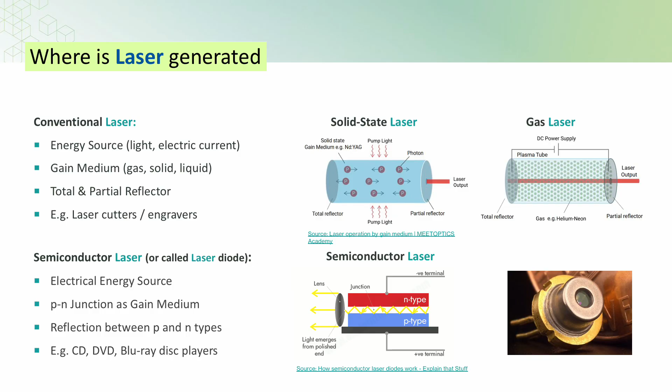Semiconductor laser is another kind of laser that uses a p-n junction to form the laser. It adopts quite a different design and is much smaller in size. We can find it in daily equipment like CD, DVD, and Blu-ray readers. For simplicity, let's stick to the conventional design first when you try to imagine and understand the laser generation mechanism.

Here is the physics of the laser generation mechanism. Step 1. Energy input into gain medium. The energy source provides energy to the gain medium to be absorbed by the atoms inside. Atoms in different gain media would have different energy levels and thus different sizes of gap between energy levels. This gap determines what wavelength of energy the atom can absorb, store, and emit.

Step 2. Spontaneous emission. An atom that has absorbed energy becomes excited. An excited atom becomes unstable and tends to emit the energy out naturally. The emitted energy has the wavelength that matches the gap of energy levels of the atoms. This emitted energy can also be called a photon.

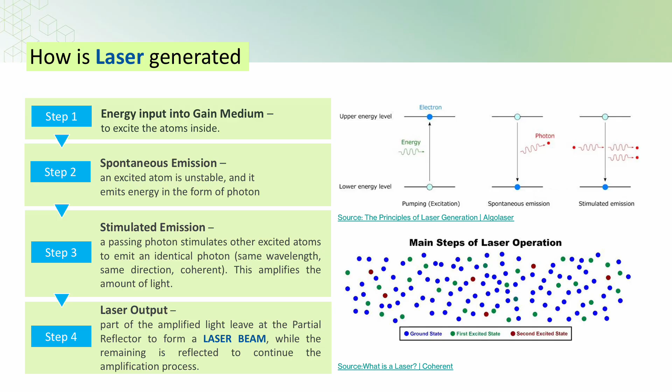Step 3. Stimulated emission. The emitted photon will move through the gain medium. When it passes through other excited atoms, it stimulates the excited atoms to emit photons of the same wavelength that move in the same direction and coherently. It thus amplifies the amount of light. Step 4. Laser output. Part of the amplified light leaves at the partial reflector to form the laser beam, while the other part is reflected to continue the amplification process. This is how a laser source generates laser continuously.

It is a table about how different materials of gain medium would emit different wavelengths of energy and their application. For example, CO2 gain medium would help to emit laser light at wavelength 10,604 nanometers, which is in the range of infrared. Suitable wavelengths of lasers must be chosen for different applications. For example, the laser light emitted from CO2 laser does not have wavelength efficiently absorbed by metal, and thus CO2 laser is not suitable for cutting metal.

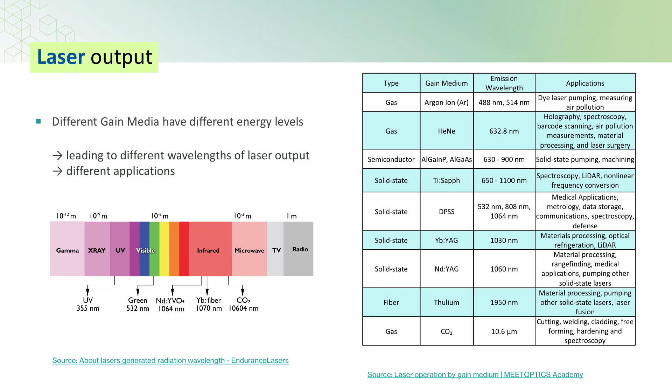Lasers are widely applied in different fields. For example, in medical fields, it is used for kidney stone removal, while in scientific research, it is used in LiDAR system to detect weather conditions. Lasers are often used in the laser show for entertainment. In daily life, we can also often see the use of laser, like barcode scanner when we check out in supermarket, and DVD reader at home. We also have laser cutting and engraving for industrial use, and laser used in optical fibers for communication.

Now let's move on to the laser classification. The EMSD of Hong Kong government has a web page providing laser safety guidance, which are composed based on International Standard IEC 60825, provided by International Electrotechnical Commission. Our laser safety and classification would be based on the guidance provided by EMSD. Laser product can be classified into Class 1, 1M, 2, 2M, 3R, 3B, and 4.

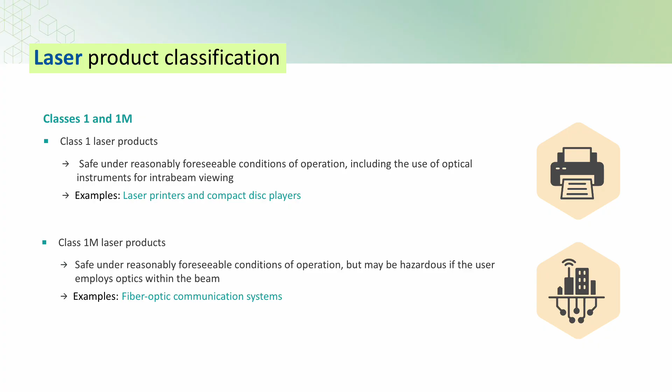Class 1 laser product is regarded as safe under reasonably foreseeable conditions of operation, including the use of optical instruments for intra-beam viewing. Examples are laser printers and compact disc players. Class 1M laser product is also regarded as safe under reasonably foreseeable conditions of operation, but may be hazardous if the user employs optics within the beam. Examples are fiber optic communication systems.

Class 2 and 2M laser products have higher risk than Class 1 and 1M. For Class 2 laser products, it is considered not inherently safe for eyes, but protection on your eyes by natural aversion response is usually adequate. Examples are laser pointers and barcode scanner we use in supermarket. For Class 2M laser products, eye protection by aversion response is also advised. The product would also become more hazardous if user employs optics within the beam. Example is the level and orientation instruments for civil engineering applications.

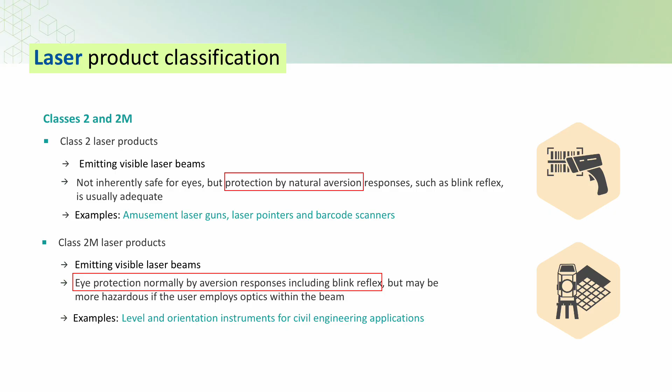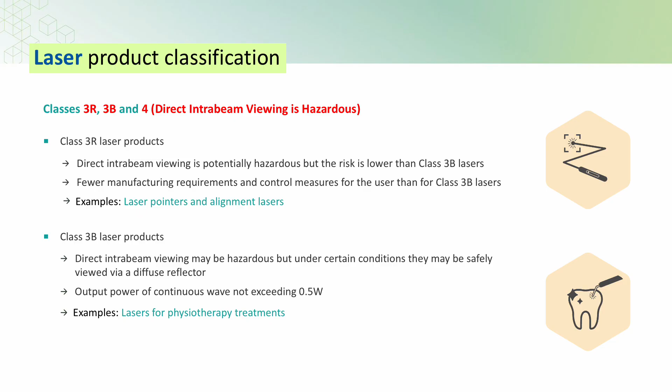Class 3R, 3B, and 4 laser products are considered potentially much more hazardous to eyes in direct intrabeam viewing. Natural aversion is not enough for eye protection from these laser products. Class 4 laser products are the most potentially hazardous one. It is a high-power output device. It could cause not only damage to eyes, but also skin injuries. It could also constitute a high chance of fire hazard. The reflections of the laser can also be very hazardous. Extreme caution is required when it is used.

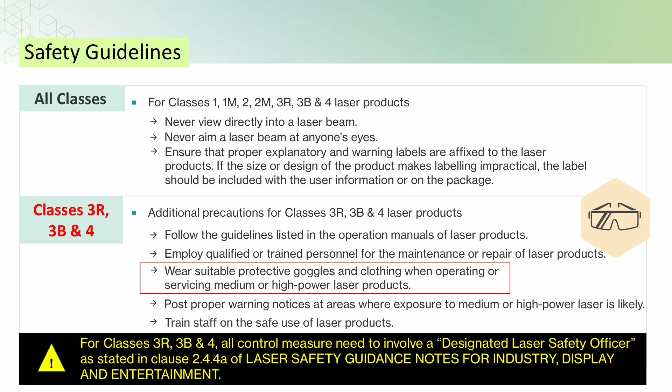These are the safety guidance when different classes of laser products are used. As a user, 1. Never view directly at a laser beam. 2. Never aim laser beam at anyone's eyes. 3. Understand the information of explanatory and warning labels, which manufacturers affix on the laser products. For Class 3R, 3B, and Class 4 laser products, the EMSD provides much stricter guidelines, including appointment of a designated laser safety officer to handle all the control measures, and wearing protective goggles and clothing.

Now let's move on to introduce laser cutting and engraving. The laser itself used by laser cutters and engravers typically falls in Class 4 category. However, the whole laser cutter and engraver machines are usually categorized as Class 2 or even Class 1 because they are designed to have protection mechanisms when the product is used in expected way. For example, machine is enclosed with interlock when the laser is on. Interlock is usually installed at the doors that can be easily opened to turn laser off immediately if the door is opened.

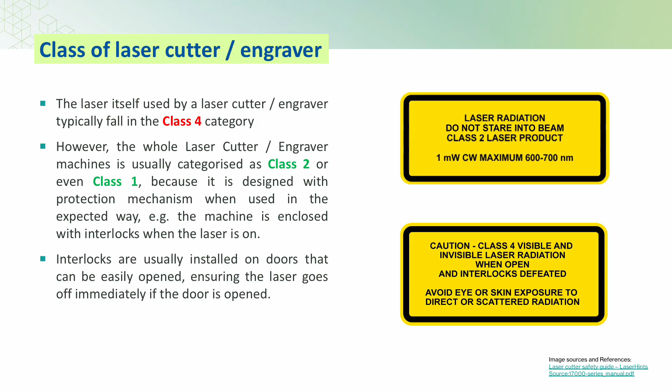Laser cutting and engraving are material processing techniques that use a focused laser beam to remove material. Cutting is about completely cutting through the material using laser at high power and slow movement. Engraving is about mainly removing the part of the material on surface.

The laser system uses a series of mirrors to transfer the laser beam from the laser source and uses a lens to focus and bring the laser to the material. Motion is controlled by your setting input into the computer.

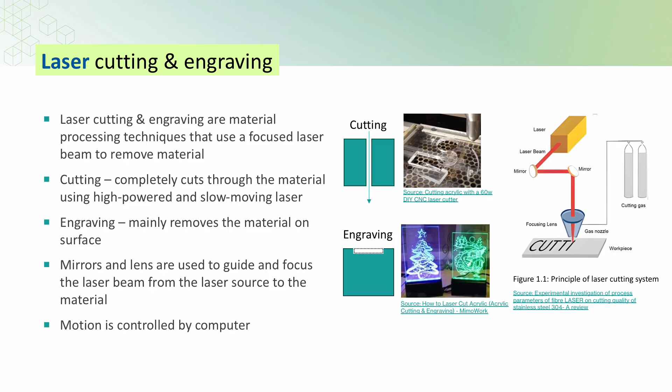The mechanism behind material removal is that, firstly, material absorbs energy from the laser. Secondly, the amount of absorbed energy meets the threshold of ablation. Ablation can be evaporation, sublimation, or chemical decomposition. Finally, material is evaporated and removed.

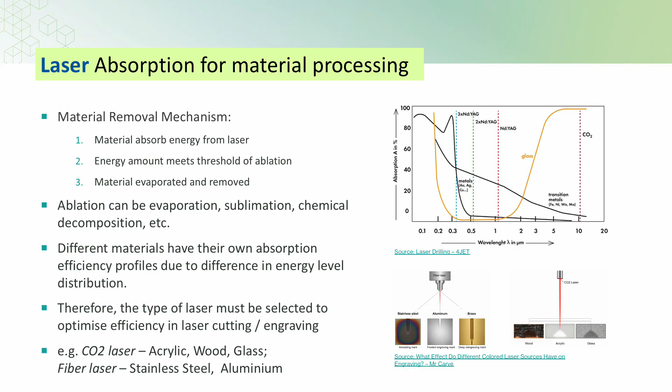As mentioned previously, different materials would absorb different wavelengths of energy. Suitable lasers must be selected to optimize the processing efficiency. Laser output typically has 2 modes. One is continuous mode. Laser output is continuous and consistent. It can process material fast and is good for high-volume production.

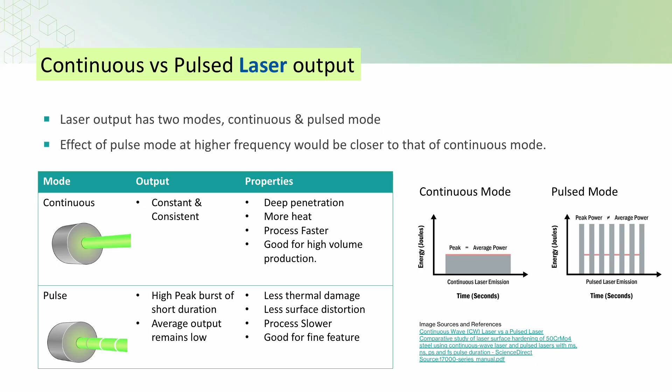The other one is pulsed mode. Laser output is at high peak bursts of short duration, while the average output can still be the same as continuous mode. It could cause less thermal damage, like charring, and less surface distortion to material. It is good for producing fine features. Some laser machines allow you to choose the frequency of pulses during laser cutting to make the processing quality suitable to the need.

The laser machine is also a device using computer numerical control principles to control the motion and laser output. Users may use software like CorelDRAW, Adobe Illustrator, SolidWorks to prepare 2D drawings. Users will need to assign laser power and speed to different colors of line or area in the drawing. Then load all the processing instructions into the computer, including power, speed, and 2D drawing. The controller then follows the instructions to control the laser output and XY motion to conduct cutting or engraving.

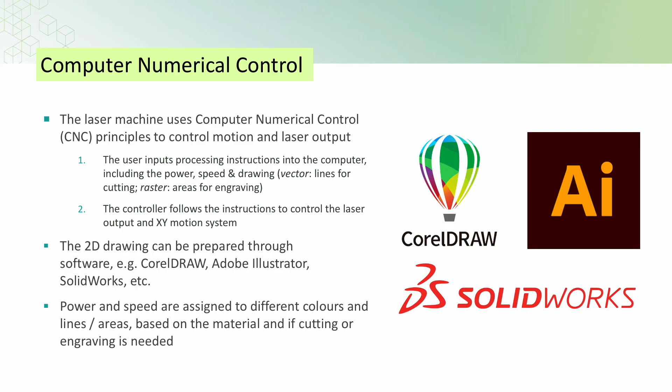These are examples prepared by laser cutting or engraving. Laser engraving is used to put drawings on pieces of acrylic and wood, then cutting is applied to take them out. Laser cutting can also be used to cut out parts to be assembled to form a model. Since the laser beam has a radius, margin will have to be given in the drawing so that the parts can fit with each other tightly.

Now, let's talk about health hazards we should be aware of for laser cutting and engraving. Here is an overview of common hazards of which we must be careful. Eye damage. As discussed before, the laser beam can cause serious damage to the retina and vision impairment which could be irreversible. Never disassemble the protection mechanism of the laser machine or look at the beam directly.

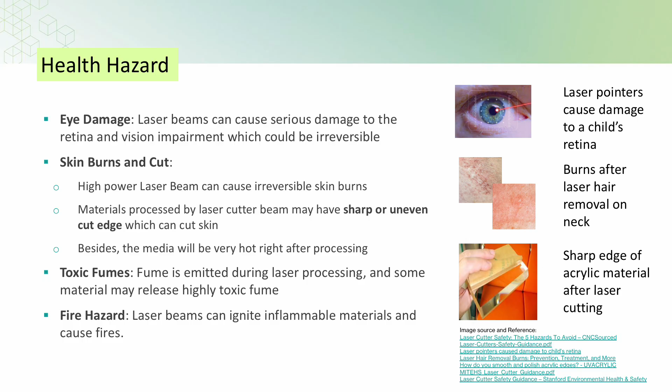Skin burns and cuts. A high-power laser beam can cause irreversible skin burns. Materials processed by the laser cutter beam may have sharp or uneven edges of cut, which can cut skin. Besides, it is still very hot right after processing. Toxic fumes. Fume is emitted during laser processing, and some materials would release highly toxic fume. Fire hazard. The laser cutter beam can ignite flammable materials and cause fires.

A high-power laser beam can cause very serious and irreversible damage to our eyes, even in a very short duration. Eyes are especially susceptible to damage by the laser beam, especially at wavelengths between 400 to 1400 nanometers. The laser beam will be focused by the lens to a spot-size area on the retina, where the energy is concentrated, causing very serious damage. Even the reflection of a powerful laser beam could also be very dangerous.

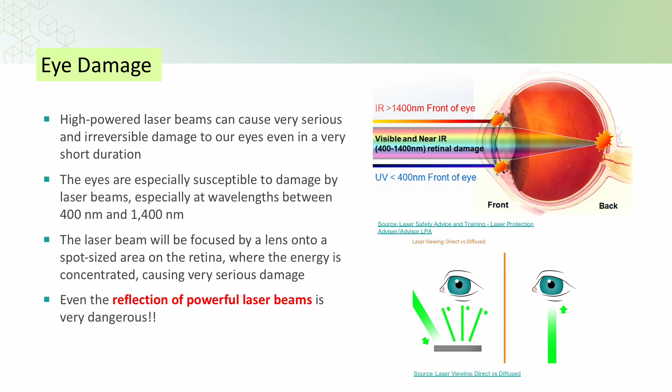About the hazards that come from material interaction with the laser. Acrylic and wood would emit irritating and harmful fume, but are generally accepted by maker labs with suitable air ventilation and filtering. However, direct and long-time exposure is still harmful to human health. Some materials which may pose danger to human health and damage to the laser machine are generally prohibited.

The first to pay attention to is PVC. Do remember, no PVC is allowed. The fume it emits is not only very toxic, but also damaging to the laser machine. Processing PVC is strictly prohibited, and it would immediately void the machine warranty.

Below are some examples of materials that are not suitable for laser cutting or engraving. Some materials like PTFE, epoxy, PC, ABS, HDPE, fiberglass, carbon fiber would also emit highly toxic fume. Some materials like PS foam and PP foam are highly flammable, and thus they are not suitable either.

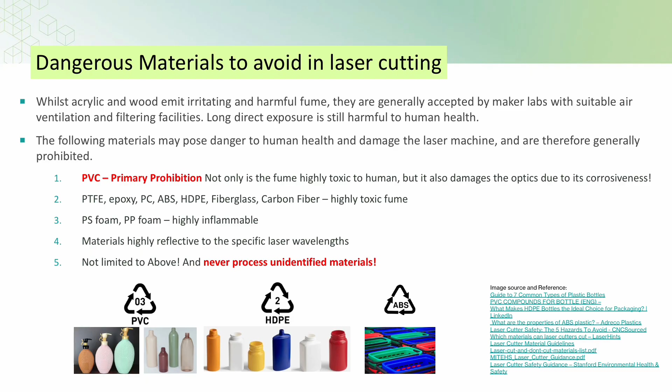Some materials that are highly reflective to the wavelength used by the laser machine are not suitable too, since the reflection may also cause damage. Dangerous materials are not limited to those just mentioned. And one very important thing to remember, never process unidentified material, as it will expose you to high and unknown risk.

About fire hazards, the material being processed by the laser beam can become very hot. Suitable ventilation for cooling and removing the combustible gas and dust generated during laser processing is always needed to minimize fire risk. Regular cleaning to remove accumulation of dust and debris from the chamber is also a good maintenance habit to remove combustible material. Furthermore, too dense or too close cutting lines in the drawing would cause huge accumulation of heat in a short time and thus should also be avoided.

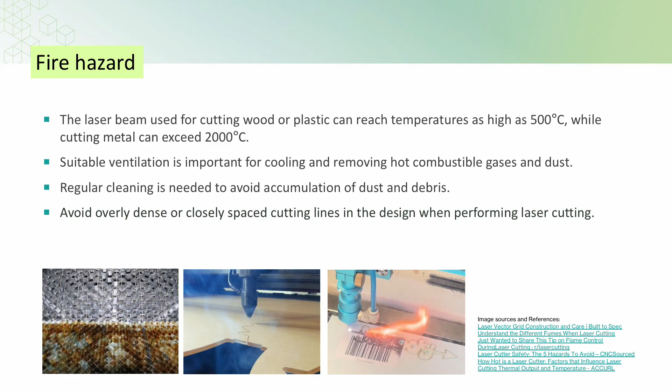Part 1 is finished here. Please move on to Part 2 to continue the training.